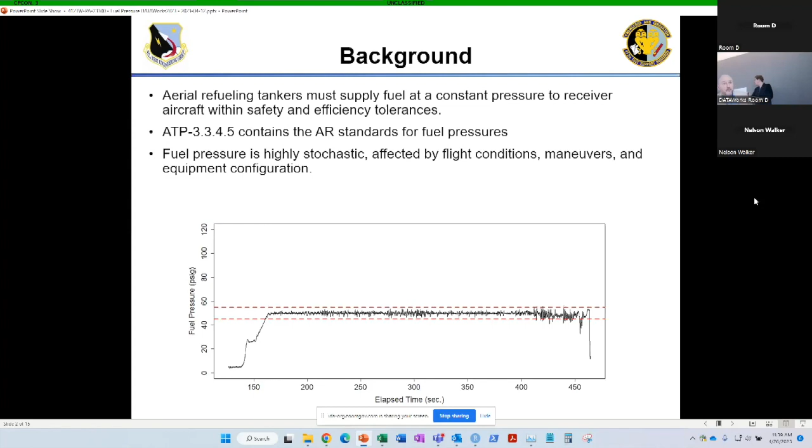So in general, fuel pressure is highly stochastic. It can be affected by a variety of things, including flight condition, what maneuver is being conducted, and how the equipment is configured. So as you can see down below, we have a bit of noise there. That's actually a very well-behaving one. It can get quite a bit noisier depending on what's going on. Slide.

So in general, we've got a couple of things that feed into the evaluation criteria. That includes the presence of oscillatory behavior, because again, we want that to be constant. So if things are oscillating, that can cause problems. The number of nuisance disconnects: can the tanker and receivers stay connected? Are they only disconnecting when they're supposed to, or are they popping apart while they're trying to transfer fuel?

And then the max fuel pressure for both steady state and transient behaviors. That can change depending on what pairing is being used, because those numbers are dependent upon the particular aircraft. And so usually we are working off of whatever the smallest of the two is, that max fuel pressure.

In general, our evaluation relies on calculating some metrics as well as traditional statistical inference. So, for instance, how much time is spent in a particular type of state. How much time are you oscillating? How much time are you in steady state? How much time are you having transitory spikes above where you want to be for the fuel pressure range?

We also want to try to determine the expected maximum fuel pressure. So based off of the data that we collected and the variability that we saw, can we predict what a reasonable maximum might be, taking into account the variability that we saw here.

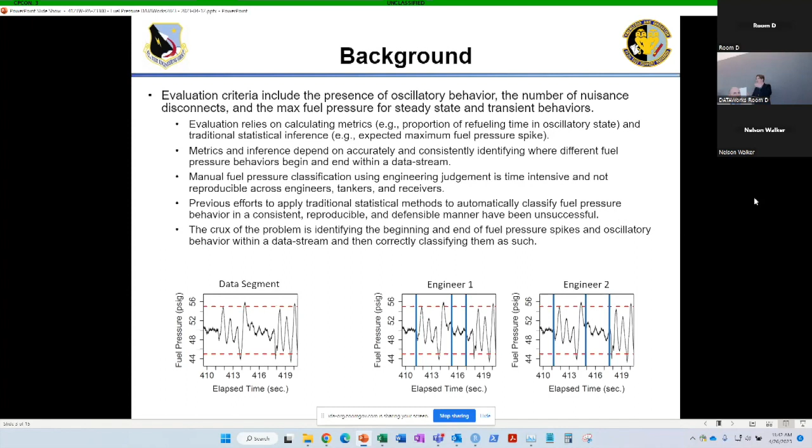What? So in general, too far. Sorry.

So in general, we've kind of developed a large backlog. So they have used engineering judgment thus far so that they can do decision-making for things like, is this pairing safe, et cetera. However, we do have a large analysis backlog, which is around 30 different report packages. And each report package is a different tanker and receiver pairing.

And so we have multiple tankers. We've got a lot of receivers between all of these tankers. And each of these packages is expected, just for the fuel pressure analyses, to take about 280 man hours to meticulously go through all of their data. So that includes the engineering time and the time for analysis. And so you can see why we are in a backlog and we haven't gotten to them yet.

So that's going to be roughly about 8,400 man hours for all of those. And we are continuing to evaluate more platforms as we go, so this list is bigger now than when we wrote this. So we are the Global Reach Combined Test Force. We are trying to wait to publish some of these things because we don't want to continuously put out data packages. We would like to be able to do all of the analyses that we need to fully report on things. And so we're trying to wait until we've developed some kind of classification system for this.

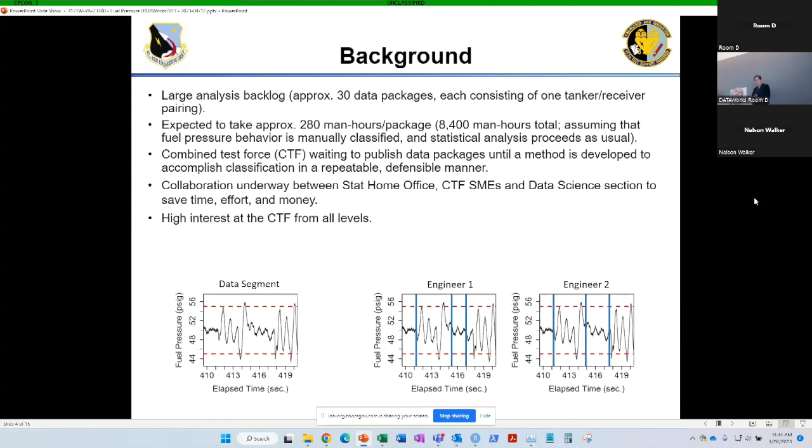And in general, it's been very interesting. We've had a lot of interest from all different CTF levels, all the way from the individual engineers going, whoa, we can do that, up to leadership going, ooh, look at all the manpower that we're saving. And so it's been very interesting seeing the different inputs and requests from different levels of interaction with our engineering counterparts. And for that, now I'm going to pass off to Nelson, where he will describe a lot of the nitty-gritty of how this works and what we have done to develop it.

Thanks, Michelle. Can you guys hear me all right? Yep. Okay, perfect.

So this whole problem set that we're trying to work through, there's a couple of different ways that we could address it. Looking at some of the other talks that we saw, reinforcement learning or machine learning in some vein would be a natural way to look at this problem. However, we don't really have answers to work with in the first place that we can hang our hat on and say, this is the authoritative answer for what's going on in these fuel pressure data streams that we're looking at.

So we came up with a solution that we call the Fuel Pressure Artificial Intelligence Classification System, or FACS. And it has a couple components that we're going to go through. The first is that we implemented a change point detection algorithm.

And that is unsupervised because, first of all, we don't know what type of behavior we're looking at before we look at it. The subject matter experts did not provide us with answers to work from, and did not provide time hacks for where different behaviors start and stop. So we're going to be coming up with that information from scratch.

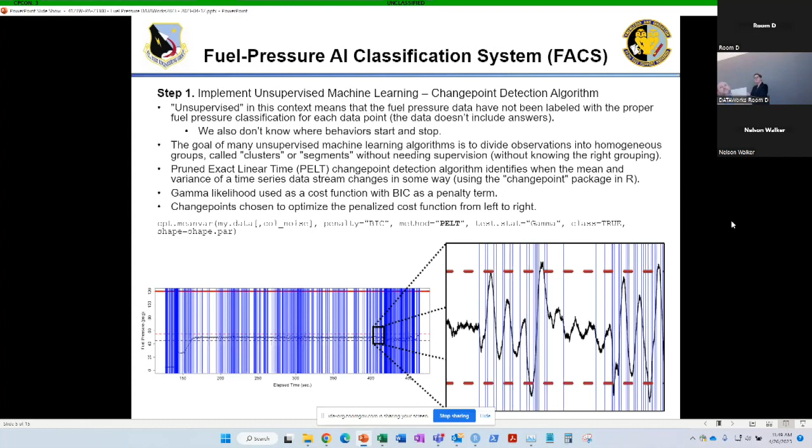And this, unfortunately, in and of itself is not enough to really have something to work with in identifying different fuel pressure behaviors. This has to be reinterpreted in some way, right? To be able to say these different segments between change points should really be classified as a specific type of behavior. And that's where the second part comes in.

We crafted an expert system to interpret those change points and then classify the segments among and between them. This has been highly collaborative and very iterative, where we put heads together with subject matter experts to build out this expert system. Expert systems are a type of AI that emulates the decision-making ability of an expert. They came into being in the 1970s and were used a lot in the 80s.

And they were applied to a set of problems that in our modern day have really been taken over by neural networks, like the really prominent ones, trying to translate languages or trying to transcribe speech to text. Those had limited success when they were first attempted as expert systems, and the cases where expert systems worked very, very well have just been integrated into life so much that you really don't acknowledge them as expert systems anymore because they're just very common.

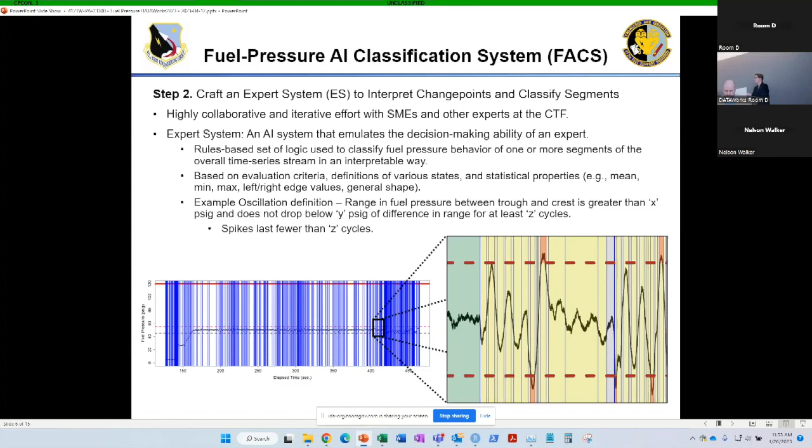So we're checking for behaviors that we call type 1 through type 4. That's basically like, how high up is it spiking or oscillating? How far low is it? How long is it spiking up or down, into varied degrees of severity? And then there's a number of points where we combine things, we're deduplicating things that were classified as different types of similar behavior that are basically checking for the same thing in different ways. Or there's a number of instances where we could have a couple of different types of behavior happening at the same time. And so this sorts through how all of that happens.

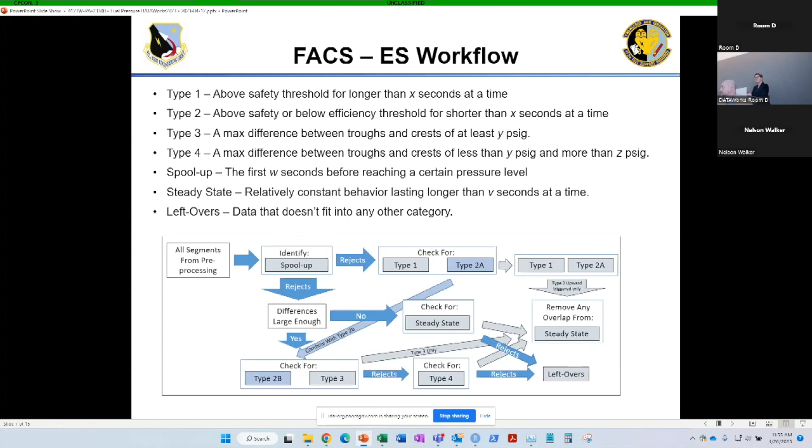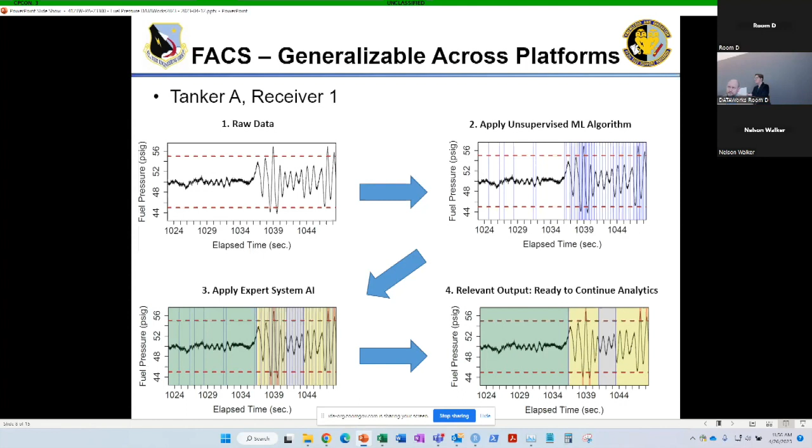Okay, to give you a sense of how this works in practice, we've got a couple of different examples to go through with our remaining time. So tanker A and receiver 1, we start with raw data that we feed through the PELT change point detection algorithm and insert change points in the upper right. And then we apply the expert system, and we start being able to code these data segments as part of an overall type of behavior. And then in the bottom right, we're left with output that is relevant to the questions that the engineers have for test and evaluation, and we continue on with other types of analytics.

To give you a closer look of what's actually happening, since we've been showing an overly simplified demonstration, this is a graph of roughly the same spot in a data stream as we've been showing previously. And we break out all the different types of behaviors that could be happening either simultaneously, or if one's not happening, the other type is, you know what I mean? So we've got quite a list here in the upper right that's all color coded.

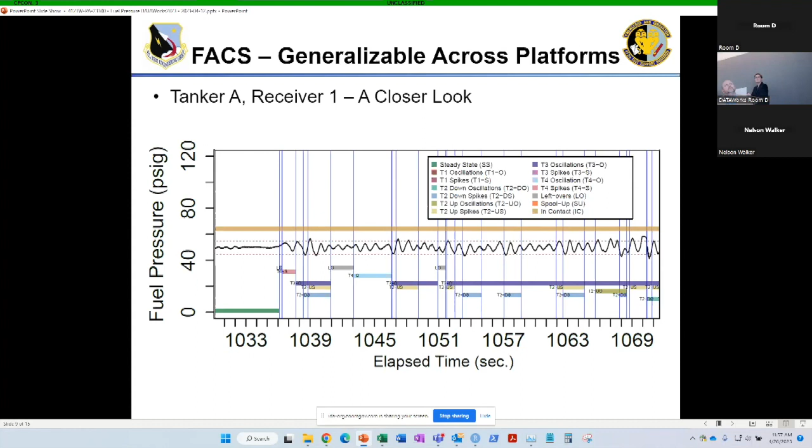Any kind of colored bars down below these red dotted lines are a different type of behavior that either the engineers care about learning about and or the statisticians care about keeping track of. So we start off with steady state to the left on this plot, and then the data stream starts having transitory behavior, and we're classifying all the different bits and pieces in a fairly nuanced way here.

And here's again another form of data that we collect on tanker B with a third receiver that we hadn't seen before. It varies quite a bit.

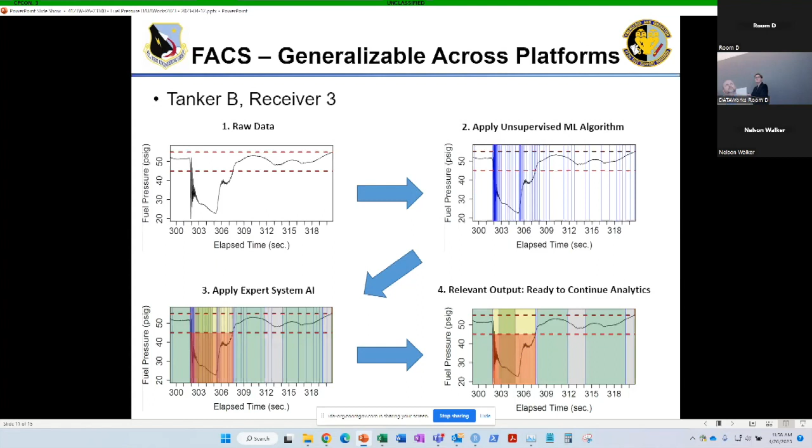Okay, back to you, Michelle.

All right, so in general, this will allow our classification to become a lot more consistent, sensible, accurate, repeatable, knowing what settings we put things at. Engineer 1 and engineer 2, or statistician 1 and statistician 2, can get the same answer. We'll get the exact same output if we run the same data with the same settings. So being able to figure out what are those settings for different receivers, for different tankers. In general, I think it is usually the tankers that have been dependent for changing any particular settings.

But it will enable us to leverage all that time, effort, money, decision-making that we've needed to do this manually to instead use it on future projects. So it also frees up the SMEs and engineers to do additional work. Because things are subjective to how we were trained and what kind of experience we have, often they have to duplicate that work because one person will look at it and be like, "Yeah, I don't know about this." And then they have to discuss it sometimes at length to figure out what it is really supposed to be. And sometimes they will disagree with each other about what that classification should be.

And so by including them in this process iteratively to get their feedback every time we find something new: did this do it right? What kind of behavior is this? Can we account for it? Can we add in a new part of the rule, et cetera? So that frees them up. Okay, we've already made a lot of these decisions. We can do spot checks versus having to discuss them more in depth.